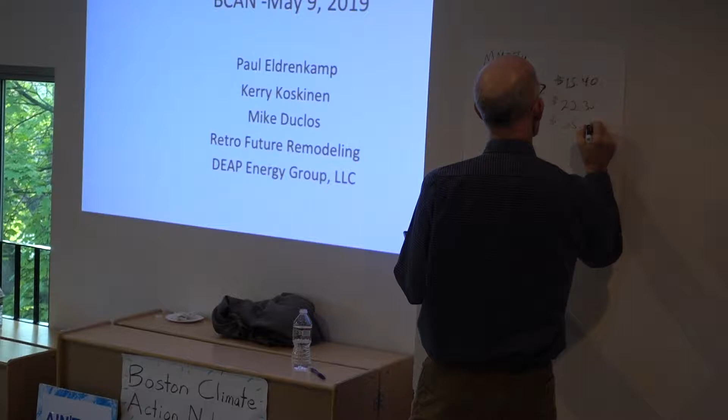It's a little more than $15. Oh, there it is, $15.40. I'm using average prices. A gallon of fuel oil costs $22.35, and a kilowatt hour of electricity costs $65.92. So that's a million BTUs, per million BTUs.

So we're asking people to electrify their homes. So how does that make sense if a million BTUs delivered by electricity costs 4 or 5 times as much as a million BTUs delivered by natural gas? This is something to be aware of. So the second thing you have to factor in is how efficiently can you use those units of that type of energy.

So how efficiently can you use natural gas typically? Does anybody know what an average efficiency for a boiler is? Maybe 90%, maybe. 90% for a good one that's humming along. A good oil boiler that's humming along is about... I'm going to compare 80% efficiency for gas and oil.

So I'm going to do another conversion. You'll have to take this on. You can come up to me afterwards and get the detailed math if you'd like. But I'm trying to make a broader point here, so I don't want to get too much into the math because I will lose the rest of the audience.

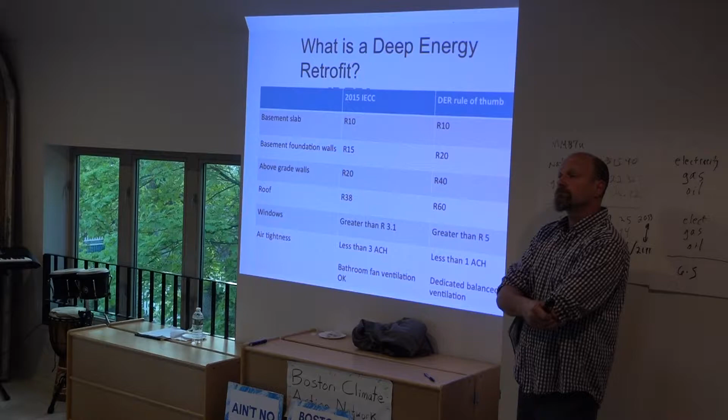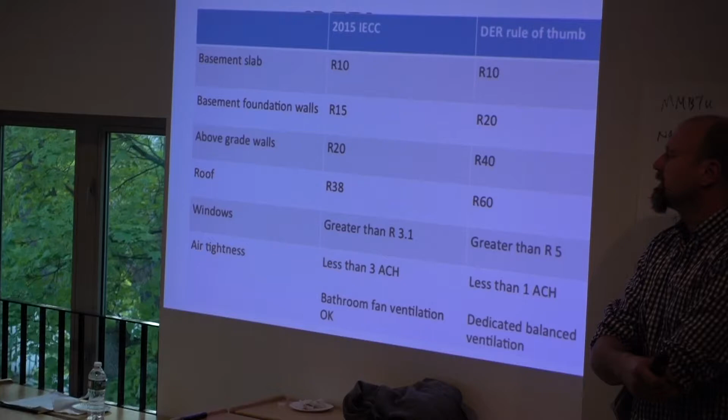So the question is, how do you define a deep energy retrofit? There certainly isn't a building code that says deep energy retrofit, but the main goal is that we want to do beyond what is called out in the building code, the energy code. And here's just a good example. The DER, Deep Energy Retrofit rule of thumb, originally came from the Building Science Corporation, I believe, which has been introducing these ideas and doing the research to vet out whether these things work and what's better and what's worse. But this is the general idea.

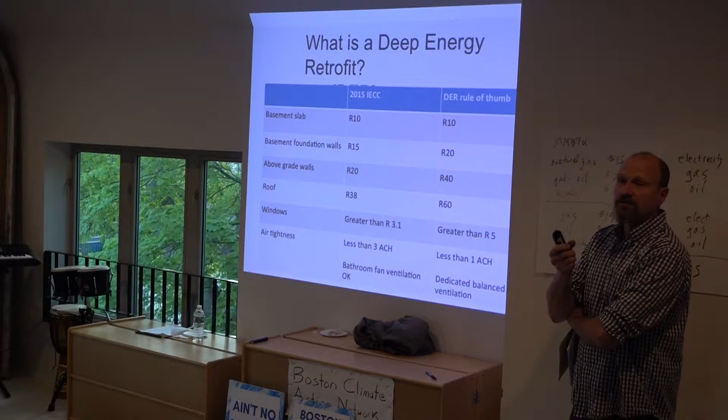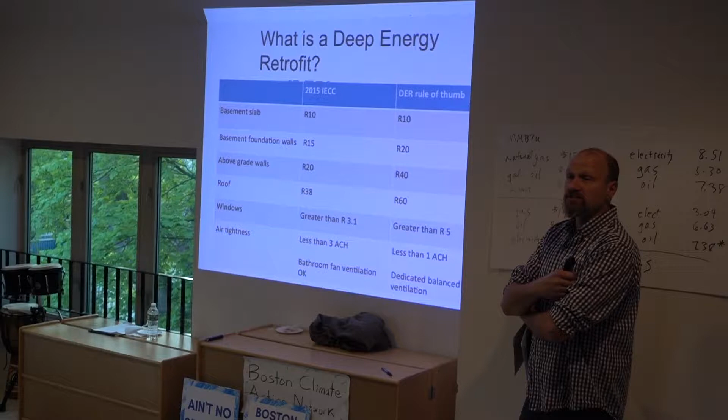And a lot of what a deep energy retrofit is, is increasing insulation levels by about double what our code is. We want to step up the efficiency of our windows. Generally that means going from double pane windows to triple pane windows. And airtightness is a big one. Airtightness is not very strict in the building code, and the tighter you get it, the less energy you waste through those holes and cracks. So in a deep energy retrofit, we aim to get it as tight as possible.

There is one caveat that I put down below: you can build a house to code and make it really airtight, and the building code allows us to use bathroom ventilating fans to ventilate the house, to get you fresh air to breathe. And as you can imagine, if you try to push air out and none comes in, you're not pushing air out. So ventilation, I have a suspicion that even airtightness still makes contractors crazy. They think all houses are going to rot.

Even in my recent construction supervisor's license class, the instructor would say, you know, here's what you have to do now for energy code. The jury's still out whether these buildings are going to rot or fall apart or whatever. And it's not true. This has been done for a long time. The science is actually fairly easy. It works. It's all for the best.

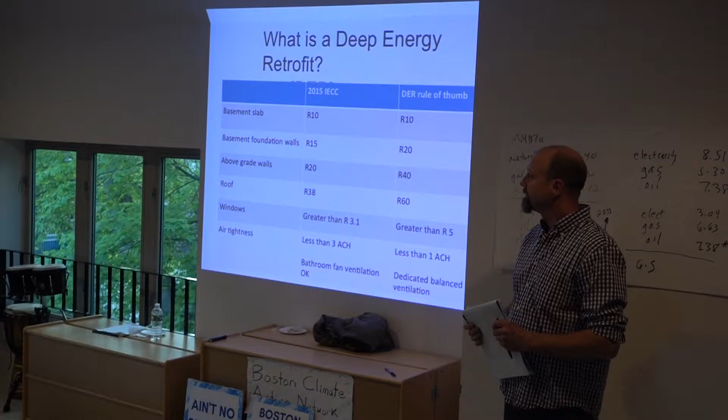So get as tight as you can, but we need balanced ventilation. If you're going to make a house airtight, great, make it absolutely airtight, but we do absolutely need full-on, dedicated, ducted ventilation systems. It's just something we don't address in general, and it's a cost.

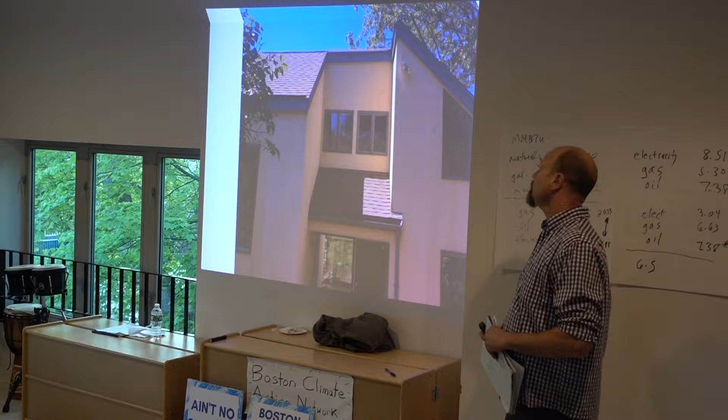So I'll get into some real nuts and bolts. This is a project I was part of. Actually, a Byggmeister project that I was hired to do the outside work on. So it's not quite a gut remodel, but it was pretty darn close. And it's a classic deep energy retrofit. So this is before.

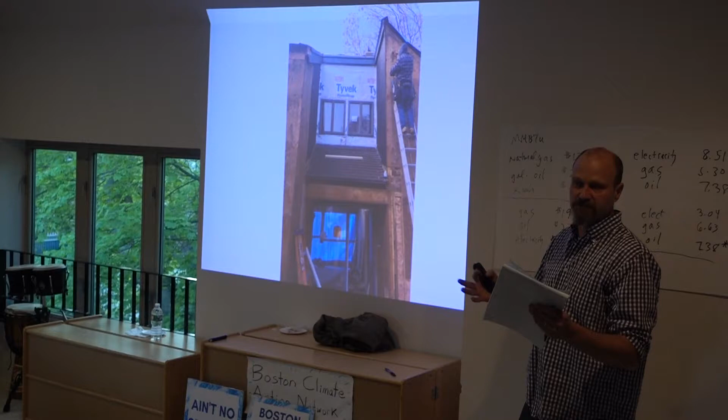You couldn't be more complicated in terms of angles and facades. So of course they all start out with strip it off, get down to the sheathing, and we didn't do it here, too technical, but this is generally the point where I put something on the building that makes it now airtight and testable with a blower door. And you can make repairs, do whatever you gotta do, to make sure you're as tight as possible before you start putting things on.

And here it is, underway. It's 2 layers of 2-inch polyisocyanurate foam board. It's foil faced. In this case, that foam board is actually the air barrier. So it's all taped, joints are all taped. The big gaps are spray foamed in and what have you. But this is, when you say R40 wall, that is 4 inches of foam, 2x4 wall with insulation in it. So that's what you get.

In this case, you will see, we actually stripped the roof and the walls at the same time and ran 4 inches of foam on the roof too. So it's one big igloo, like literally like a cooler.

Did I hear you say it's oil-based? Foil. Foil faced, I think I said. Oil-based. Foil. Thank you.

So we're worried about, in buildings, thermal efficiency. With thermal efficiency, we're worried about what I call thermal bridging. So materials that are conductive to heat, like the framing in your walls, are just like a radiator on your car. They're cooling fins in the winter. So you get a lot of advantage by having continuous insulation over your structure.

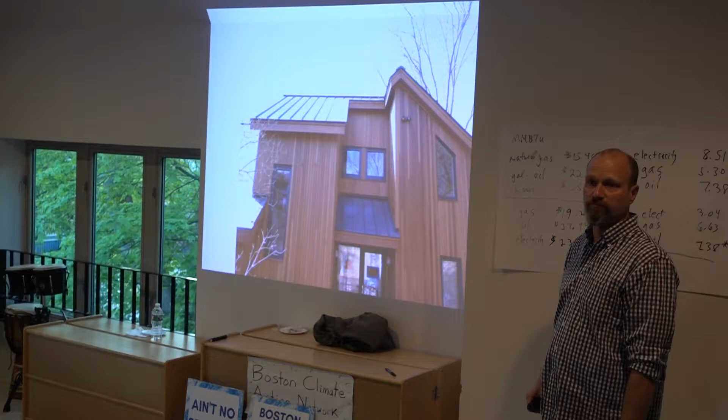And when all is said and done, you wrap all that ugly stuff, and it looks quite nice, and you wouldn't know it. It's actually hard to see here. Because it's a thick wall, when you put windows in, sometimes you'll notice that the wall is thicker either from the inside or the outside. And I will say that these are not only triple glazed windows, but they come from Europe, as all good windows do. And these are what we call an R value of like 7 compared to 2-ish of what would be code. So tilt-turn windows.

And of course, again, blower door. If you haven't seen it, blower door to address air tightness. On the side, I have a project. This is actually a 1780s cape with comfort issues. And so between moisture management and insulation and being able to maintain a 1780s house, it was an interesting project.

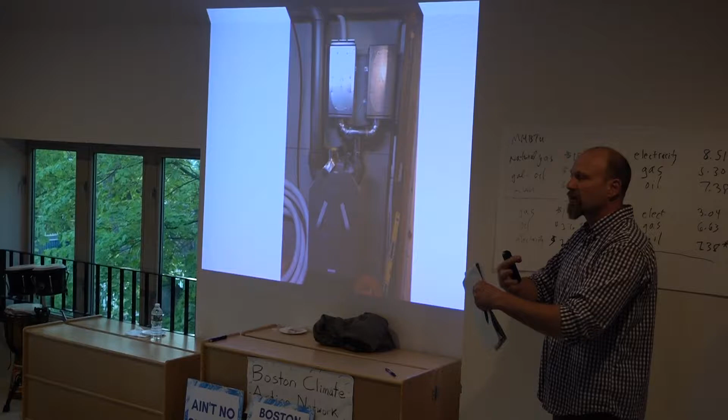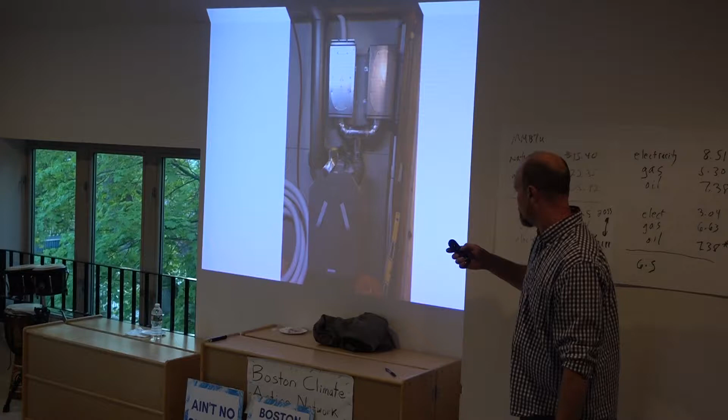And heat recovery ventilation. So all airtight houses need heat recovery ventilation. And this is a unit that takes air from outside and air from inside, and they cross streams. And energy-wise, fresh air comes in and is heated by the air that goes out. There are no ducts shown in this picture yet, but there'll be a pile of tubes coming out of here that go to every room. So that was an all-in-one house. Basement got insulated with spray foam, and everything else was really exterior.

And what did that run? Cost? I don't totally know, but I'll say the extra cost of adding insulation around the outside and holding that insulation in place to put new finishes on, 200,000 more maybe? Yeah, big house, but it is what it is. And does that include adding that new balanced ventilation? Probably not. And how much might that have been? 10 to 15,000.

I'm not sure if this is a relevant question, but in terms of that outdoor insulation, is there any bearing on indoor air pollution in relationship to that? To the product itself? Just even the process, what you're doing, because you're talking about completely airtight, right? I'm just aware that indoor air pollution is a big issue. So do you look at that relationship? Absolutely.

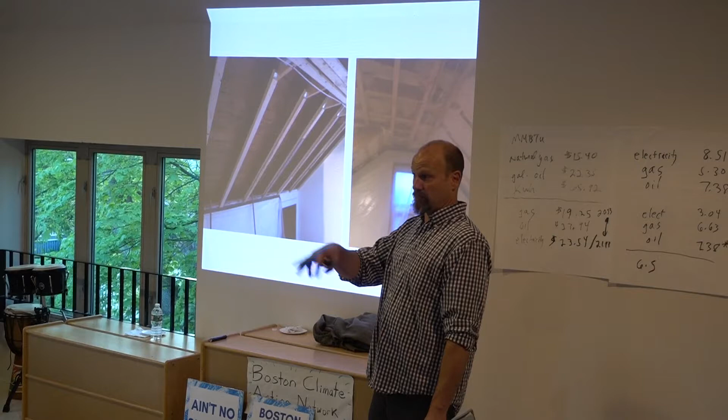Certainly Mike is more involved in actually monitoring how effective this is, but we are designing the ventilation system to accommodate exactly what you're saying. It's supposed to remove the pollutants. Now,

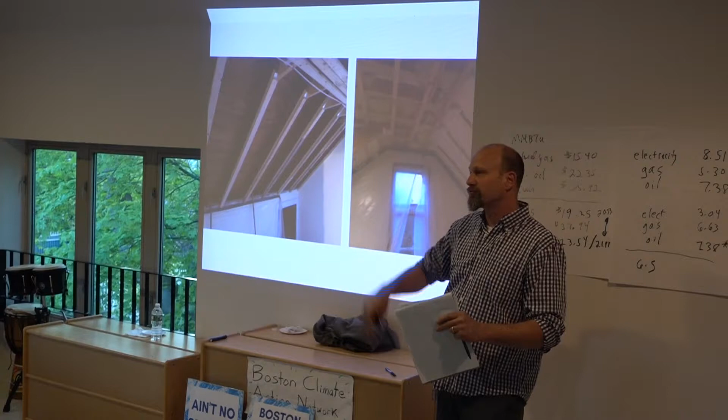you can argue that a not tight house, a very leaky house, could be far more polluted because air could be coming in through your basement and it's all moldy and whatever, and then exiting through your roof, or the opposite in the summer. I mean, when air is moving around throughout your odd spaces and walls and yucky stuff where mice live, it's not a good thing. So it's something to be concerned about.

Did that house get electrified? Totally, so there was no gas or oil being used in that house? I believe that's true. Maybe cooktop? Maybe? No, not even? Yeah, so nothing. And they have an adjacent garage with like a 10 kW array. The whole point was it's supposed to be net zero capable. And the math said it would be. I don't know if the jury's out, but it was not that long ago.

Is it correct to say that air tightening is a large category, and insulating is part of that, and then filling in tiny holes is the other part of that? In terms of order of most effectiveness for saving energy? Yeah, there you go. I think that's fair. Okay. I'd like to hear from these guys about that, but I think that's fair. And especially in light of what material are you using for insulation, what's the carbon footprint of that material, and I guess there's the order and my obnoxious truck that goes back and forth.

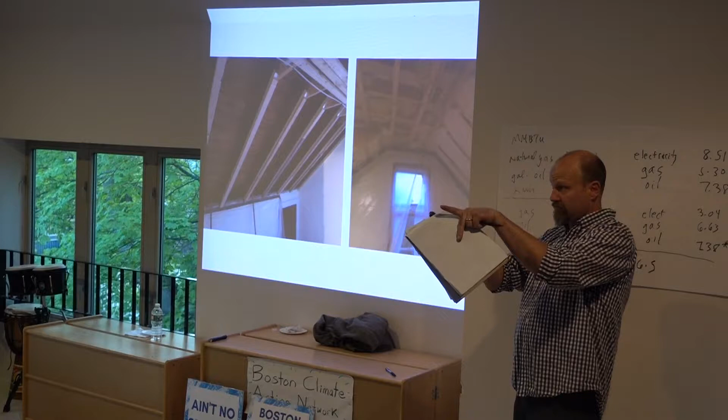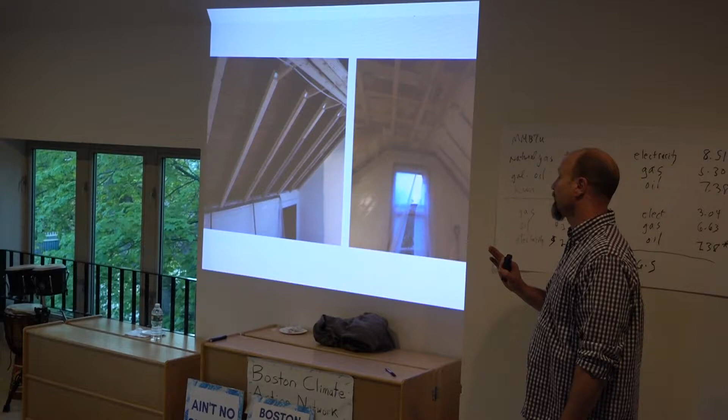So, very shallow old houses have 5-inch, 5.5-inch roof rafters. You only get this space, but you want this much insulation. So in this case, spray foam was the choice because of that. We're limited on space. It's the highest R value per inch. It was a low global warming potential spray foam. And I wasn't using it for a while until this product came out a few years ago. And now it's pretty much what people use. It's on par global warming potential with other insulations.

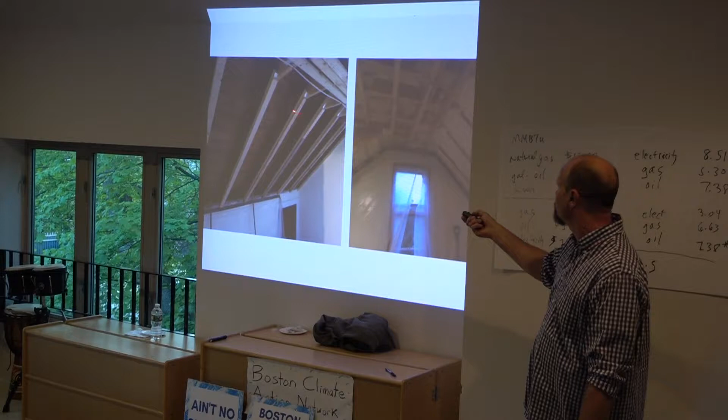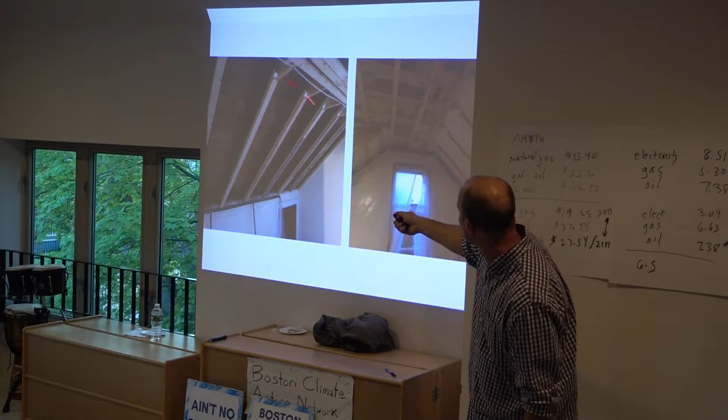So make the rafters a little thicker with some foam board separating the rafter from a new strapping surface for sheetrock. And actually it's too dark, but here's it before and here's it after. So we fill it right up, full. And this woman tracks her energy. She doesn't turn the heat on upstairs anymore. Totally comfortable. Doesn't regret a moment of it. Strip the ceiling, insulate it, put the ceiling with all the stuff back.

That project also is this one. There is a little area that was not accessible from the inside, so we spray foam it from the outside. Put it back in. Again, if I remember correctly, this is about $40,000, all said and done. And we didn't really change the living space in any way. We prevented ice damming, and we prevented her using excess heat. It's cheaper to get it right the first time. Yes. And there were structural repairs, all kinds of stuff.

So, do you have a sense of if she'll make that money back in terms of energy savings? My answer would, I think, always be never. There's no return on investment. No, you're doing it for a different reason, and often these reasons are durability, to be honest. Again, we're fixing. We've got a byproduct that the house is more comfortable and more energy efficient, but the ultimate beginning problem is that heat loss causes leaks with snow. Also secures a good price though, Tom.

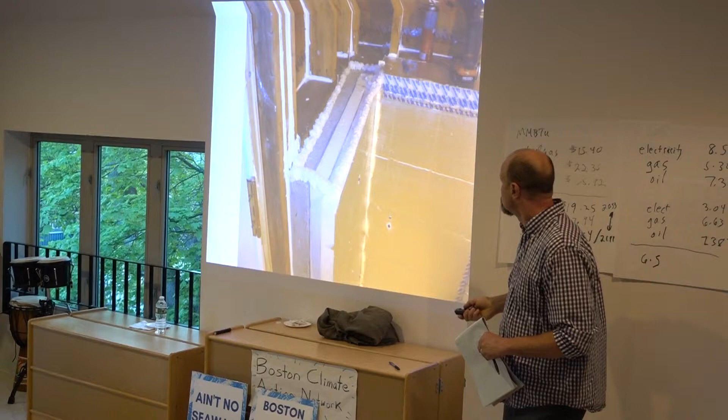You typically remove concrete basements and insulate underneath them, the floors? No. You just leave the floors alone? Stay tuned one moment, because right there. So, a few years ago, National Grid was sponsoring a Deep Energy Retrofit pilot program, and they were giving money out for Deep Energy Retrofits, if you've got a good project that needed siding, especially siding, windows, whatever.

I think my first one was a small ranch in Framingham. It still had its vintage 1945 look with aluminum windows that rattled and aluminum siding and all that sort of stuff. And a new homeowner bought the place and needed all this stuff. So he got $30,000 actually from NSTAR to implement the extra cost of triple pane windows and insulating the basement, insulating the attic, and doing all the walls. It cost more than that, but there was a program that was doing this.

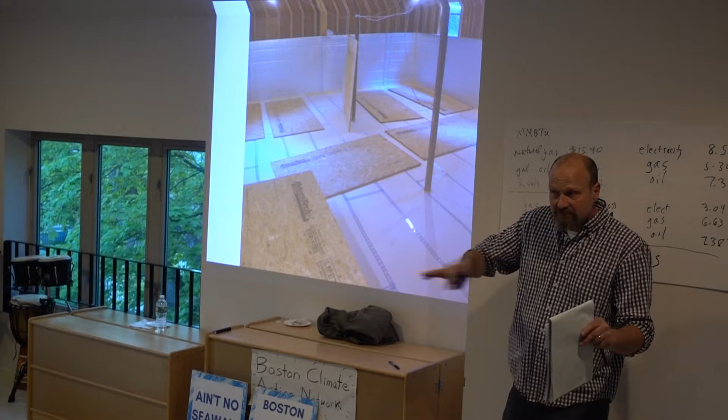In this case, this guy got funding towards doing a basement deep energy retrofit. As part of the program, you got money per square foot of what you addressed. So he got money incentives to insulate the floor. This is just a regular concrete slab. Put a dimple mat that has a little air space on top of the concrete. Then you put, in this case, EPS foam, the white stuff like styrofoam cups, a low global warming potential product that is very waterproof. And that's exactly what this stuff is on the floor. The 4x8 sheets are R10.

Would I do this without the incentives? Generally people aren't, because it's not saving energy so much as reducing the likelihood of condensation on your slab. It's a cold spot that's always 55 degrees if it's uninsulated. So the heat loss through it is not really that big. So you weigh the cost versus the benefit.

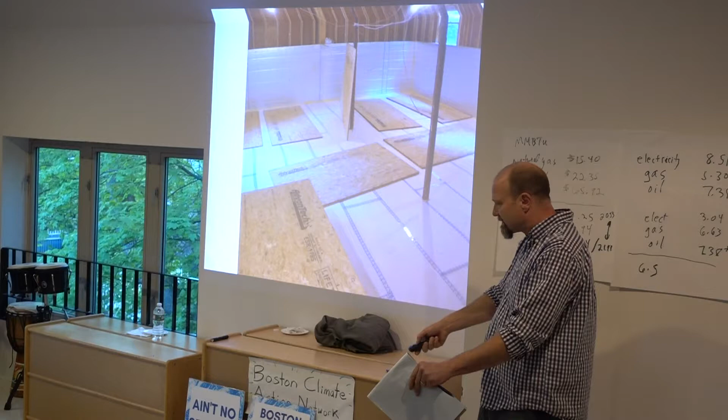Well, you said a minute ago that the level above was a lot warmer after you did this? Was it this particular procedure? It was not this particular one, but it's the same thing. This is a method not using spray foam to achieve the same result. Yeah. But there is an energy saving in that it's warmer somehow. Absolutely. Yeah, so I guess I misunderstood. Yes. Plus, I believe he used an electric heater once in a while. He had an office in the basement. He did his best, but had to use a little electric heater here and there.

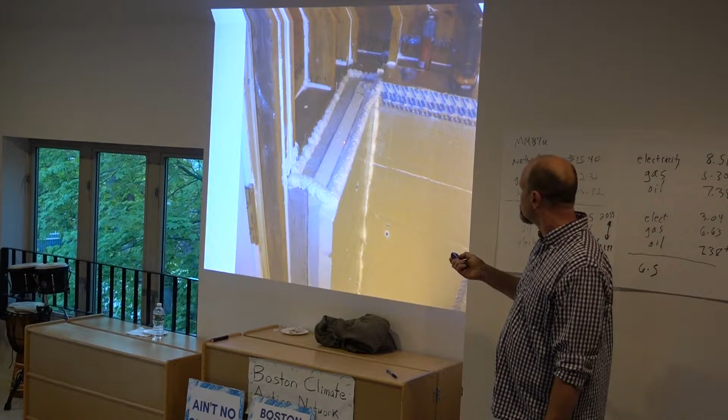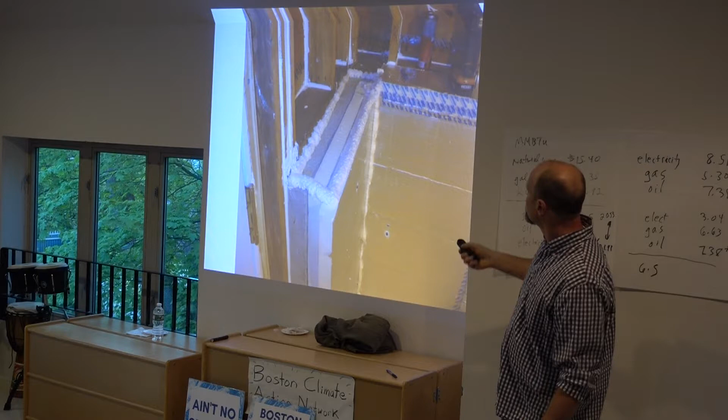So what I was saying is, yes, there is another way to do this without spray foam. This is sheet foam. Again, it's polyisocyanurate foil-faced foam, where you can tape the joints and make it airtight. We additionally make it airtight to the wood, and caulk all the seams and everything like this. So everything from the ceiling of your basement down is airtight all the way across.

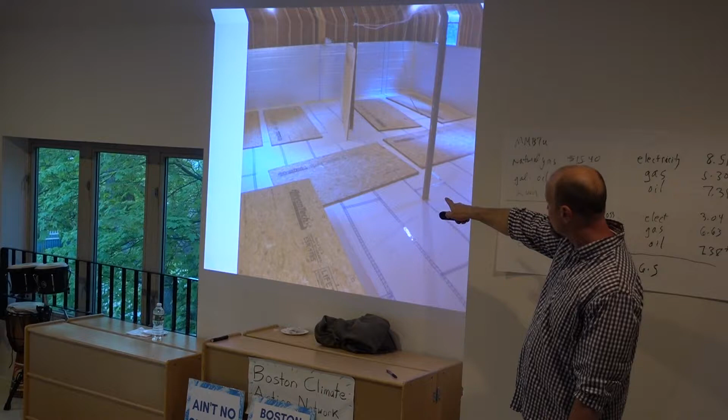And again, foam, plywood goes right onto the foam, screw it in with concrete screws, and you can put whatever finish you want on the floor. And in addition to the foam board we put in,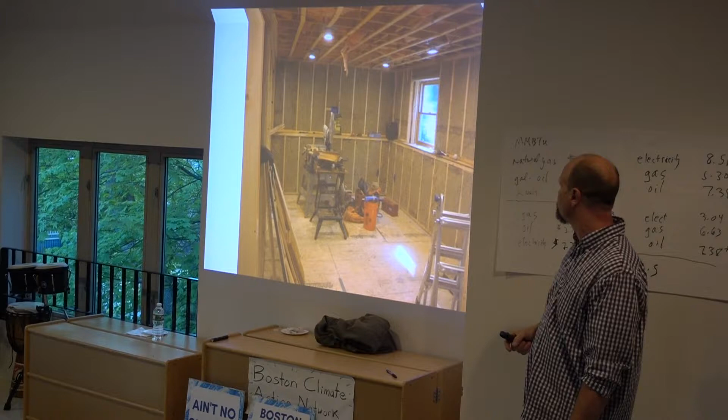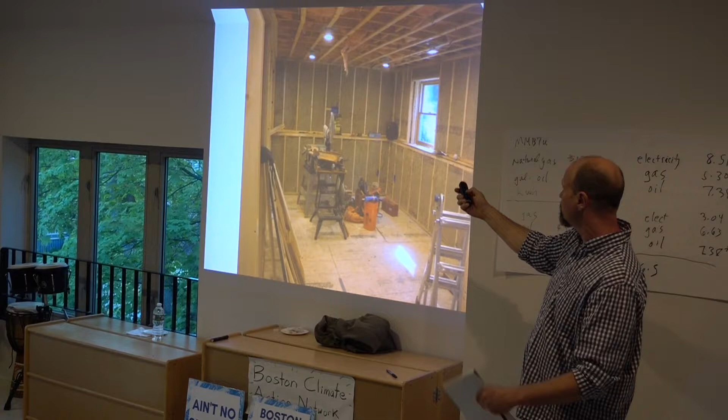we built another wall inboard to put sheetrock on, and filled that with another batt of rock wool, as well as filled the upper part with 2 layers of that. So that's actually R40 in just a fibrous product, and roughly that below too. That gets a vapor control layer on it that is not shown.

Yeah, I guess that's it.

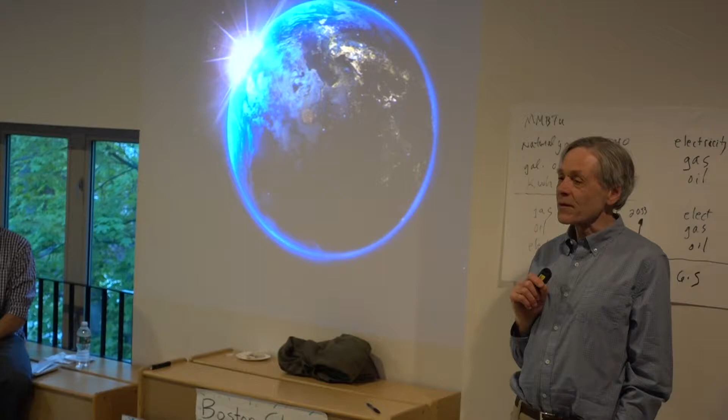This is where we live, and fun fact, let's say we took the world and shrunk it down to my size. It's 6 feet in diameter, all right? Let's say most of the atmosphere is below Mount Everest, 29,000 feet. Let's say we shrunk it down, so we have a 6-foot diameter sphere. How tall would Mount Everest be, below which most of the atmosphere is? Somebody guess. Millimeter. Small. Wow. About 51 thousandths of an inch.

Wow. So this layer that we depend on for life, and into which we're releasing a lot of CO2, is really, really thin. 1 gallon of gasoline, 6.3 pounds, releases 19 pounds of CO2. How is that possible, right? Because gasoline is a hydrocarbon. Hydrogen combines with oxygen and makes water. And carbon combines with oxygen and makes CO2. Fuel oil is worse. Gas, similarly.

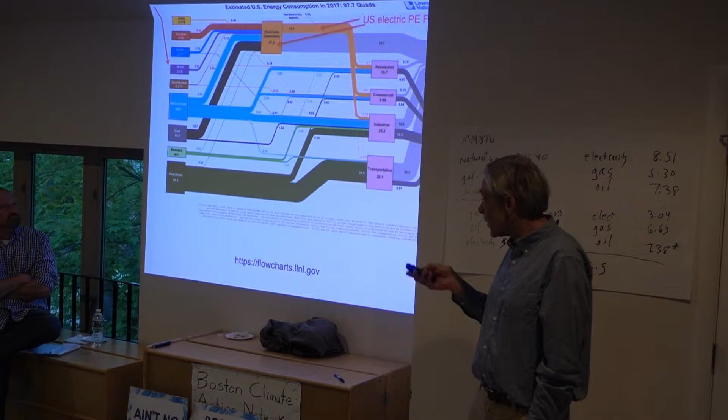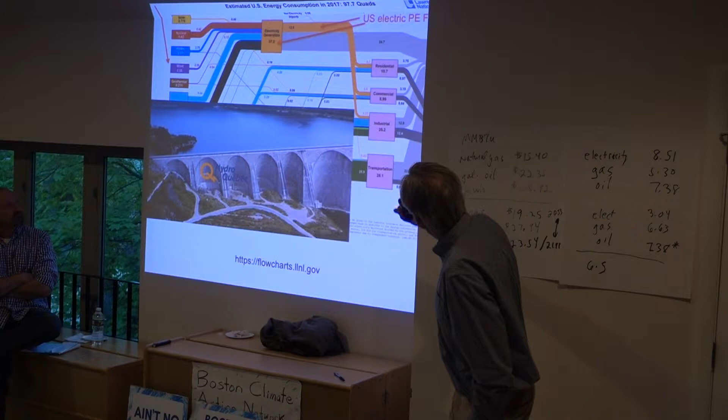And how we make electricity, we put in 37 quadrillion BTUs, it's a really big number of energy coming in, primary energy. And we have 12 or so quadrillion BTUs coming out as useful electricity, the rest is waste heat. So that's the big thing that Paul was talking about, generation. That's why electricity is so dirty, right? Because if we put in natural gas and coal, we only get out about a third. So the primary energy factor is about 3. It's about 3 to 1, just roughly.

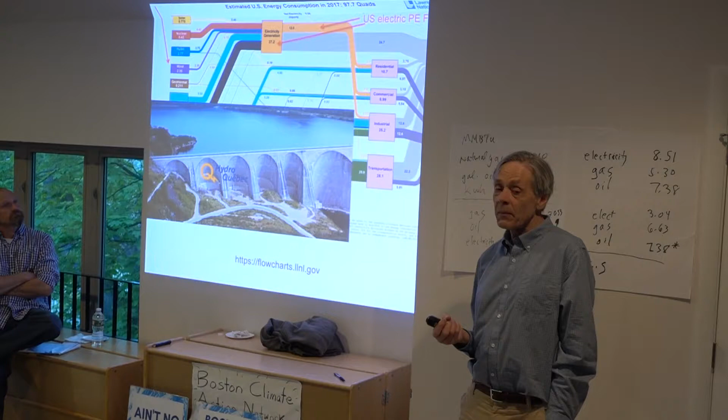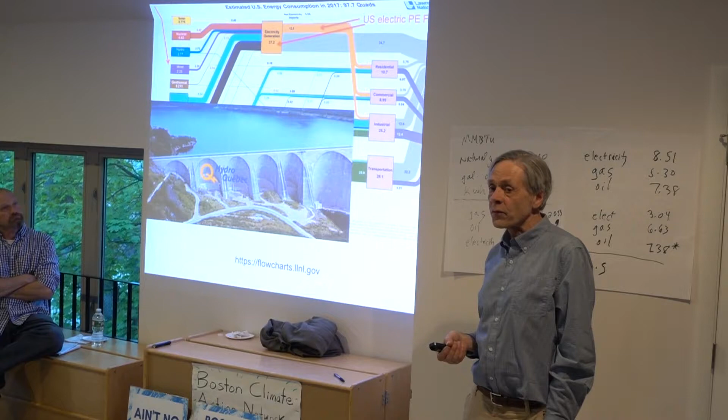So Massachusetts has this Global Warming Solutions Act, right? And they're moving to do a reduction of 80% of CO2 by 2050. The way they're going to do that is they're going to generate a lot of electricity renewably. And one method is they're going to get a transmission path through Maine and bring down Hydro-Quebec electricity, which is low CO2. And another thing they're going to do is put wind turbines out in the ocean, right? And so this process needs to get started and move along pretty quickly.

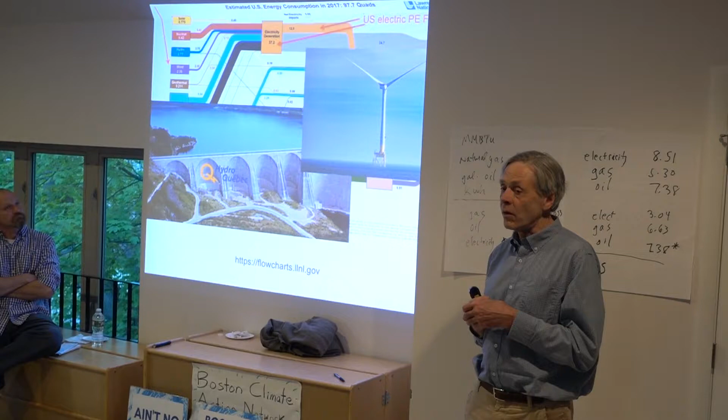And then finally, we're going to electrify all 3 million buildings in the state, except for the ones, as Terry pointed out, where it's going to be too hard to do. So 3 million buildings, we're going to do this in 30 years, it's 100,000 buildings a year. We're going to improve the energy efficiency of them somehow. We're going to electrify them so they don't use fossil fuels. That's the plan for the Global Warming Solutions Act Implementation Advisory Committee Building Subworking Group. If everybody wants to see that recommendation, I can show you.

So, the world's largest offshore wind farm is in the Irish Sea. It's an enormous facility, right? So they're doing things over there. This is five 6-megawatt wind turbines. This is off Block Island, okay, out in the ocean. That is the entire installed capacity of offshore wind in the United States today.

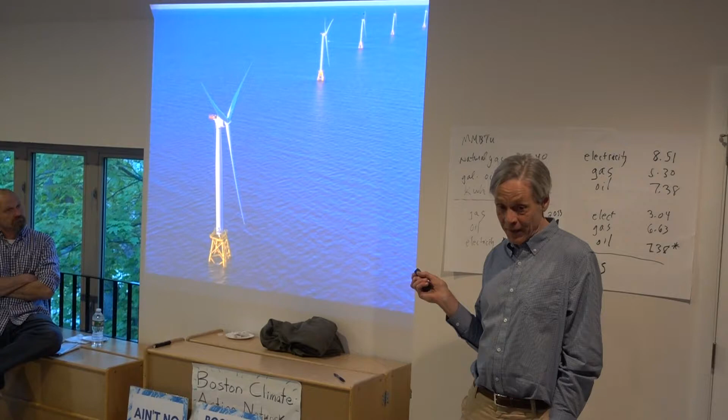We got some catching up to do. So you've heard about the procurements of offshore wind. You've heard about the leases. These are the leaseholds out in the ocean. Here's the little Block Island wind farm. So there are big plans out there, but they're not here today. This is going to take some time to build out and some expense and all that.

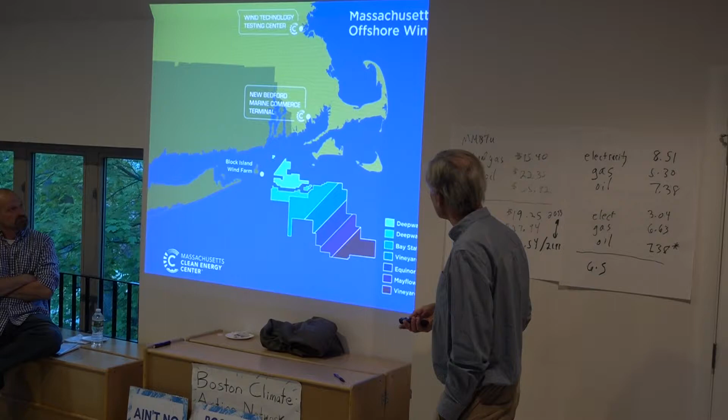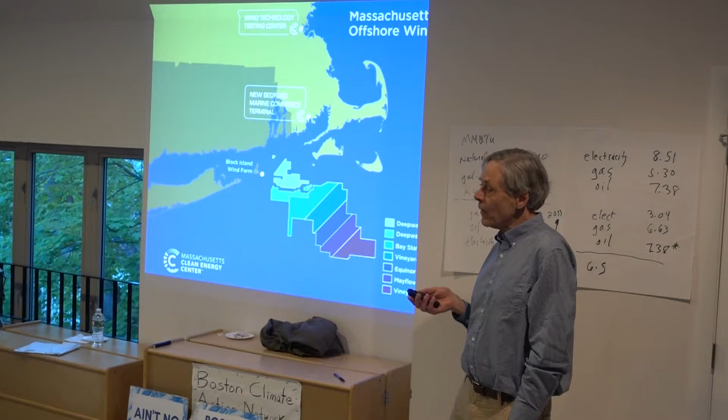But the first procurement of, I think, 800 megawatts came in at a surprisingly low price. People with DOER, our Department of Energy Resources, were shocked at how low of a price. So they're trying to get together with other states and aggregate this. So electrification and displacement of space heating is a big part of the plan that they have. Whether or not we'll be able to implement it remains to be seen.

So Paul was also talking about this idea of operational and embodied energy. Just to give you a little bit of a picture of this. So the embodied energy is in green, right? And the embodied energy, let's say this is a deep energy retrofit, or we're building a new house, your pick. You start out at the beginning and you do the work, right? So you add all this embodied energy with insulation and heat pumps and all these other things, and it's there, and it doesn't change. And then you have the operational energy, right?

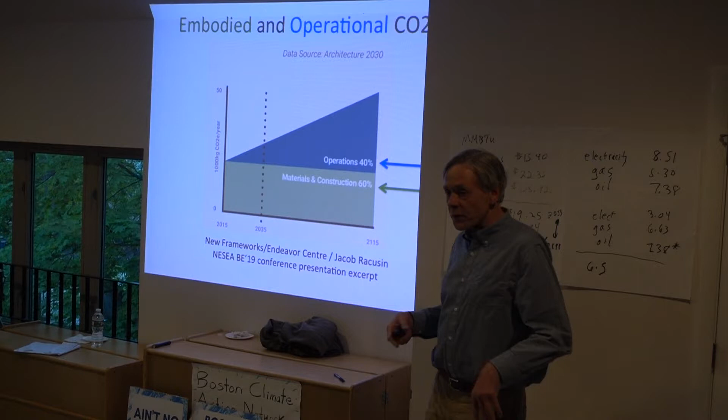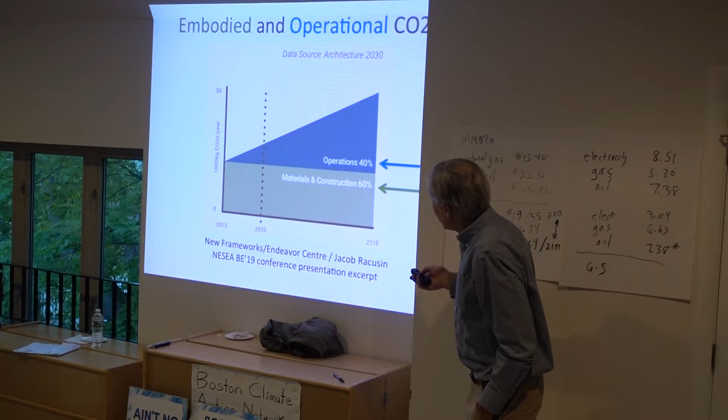So you start using electricity, natural gas, or whatever, hopefully all electricity, and year after year, your total operational energy, CO2, goes up. So this is good and bad. The good thing is the embodied energy doesn't go up. The bad thing is you spend it all now, right? It hits the atmosphere right away. So we need to be very careful with releasing large amounts of CO2 into the atmosphere by doing things that create a large amount of embodied energy. Paul talked about the ability to build houses and actually make them a carbon sink. Now do you see why that's important?

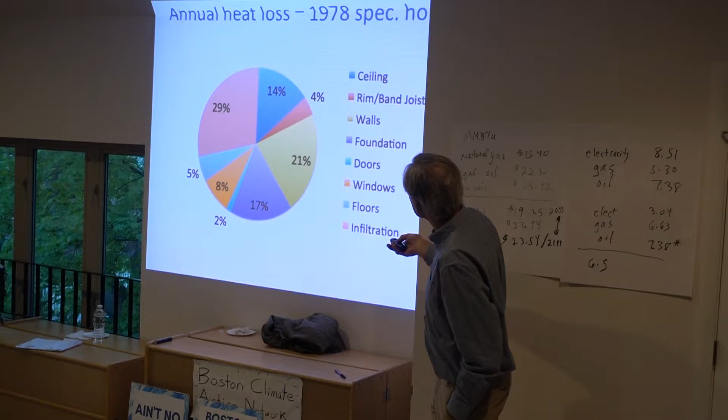So let's just focus in on that heat loss slice of the pie, okay? I've got a computer model now that shows where that heat is lost. So it gets lost in things like the ceiling, 14%, and the rim band joists, and the walls, and the foundation, and the doors, and the windows. Infiltration. Wow, look at all this. This is air coming in and out of the building, taking heat out.

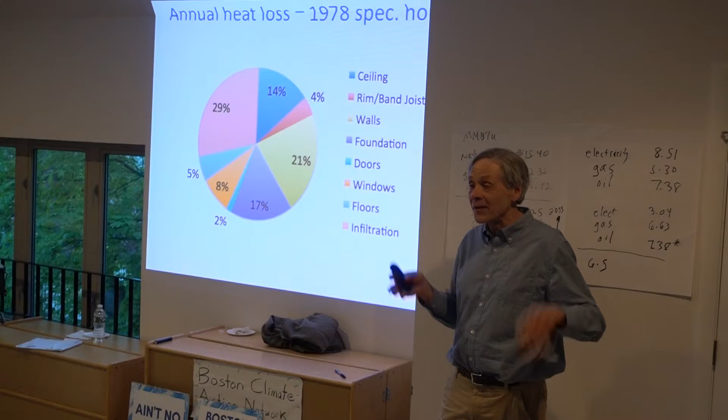And it takes so little material investment when you make a building new to do air sealing, right? You need a little bit of fabric or a little bit of tape. You don't need to use caulk if you plan a building out new. You can use tape, nice Euro tapes that are acrylics. So air infiltration is a huge lever, but the problem is when you have an already built house, it's underneath the siding, and you'd like to air seal it. That's another thing with deep energy retrofits: if you take the siding off, it's a big advantage. You can get that airtightness easily.

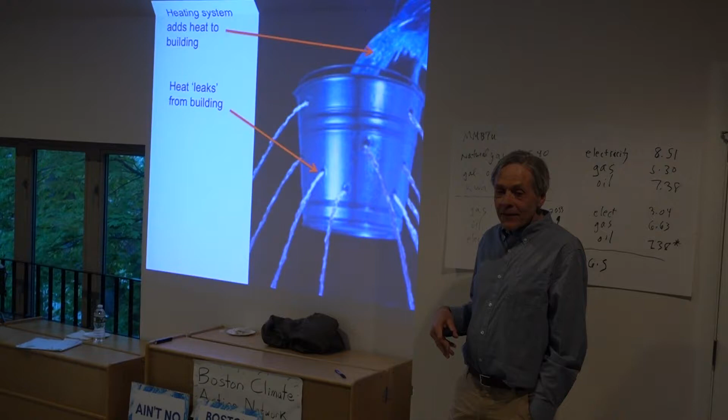So I look at a house from a space heating perspective like a leaky bucket. We've got a lot of leaky buckets around, and we're pouring in heat. So we have heat leaking out, and we have a heating system adding heat in. Now you start to think, gee, wouldn't it be a smart idea to plug these leaks? So wouldn't it be nice to do that? And this is the thing that passive house technology does, among a lot of things.

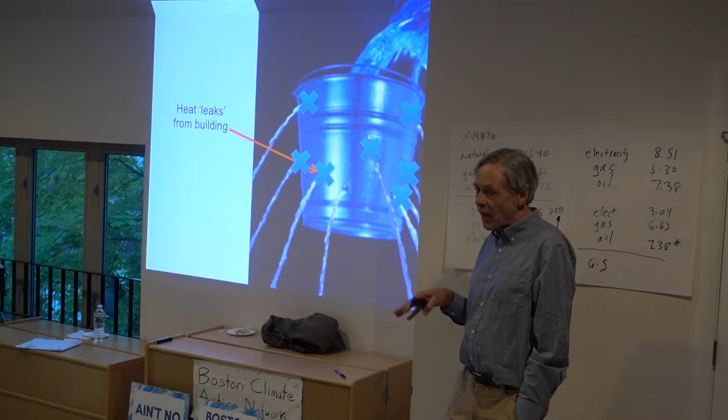But the big thing it does is it crushes space heat demand. It makes it minuscule. And then the heating system to add heat becomes very, very trivial. So there's a savings there. And if you do a deep energy retrofit, you have the same sort of thing going on, perhaps not to that extreme, but that's the concept anyway.

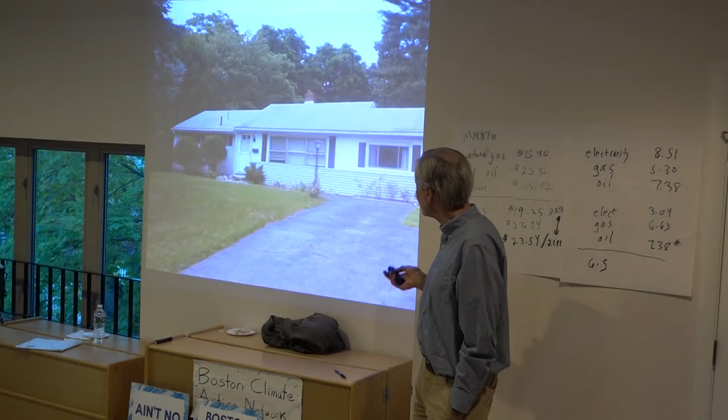Terry's wrapped this thing with 4 inches of foam and then air sealing, and there are a bunch of air source heat pumps heating it. And we've got a nice PV array, what, 10 kilowatts? Is that about right? So is this net zero, or it's probably pretty close? It should be. They don't live particularly frugally on energy. Yeah. So anyway, there's that.

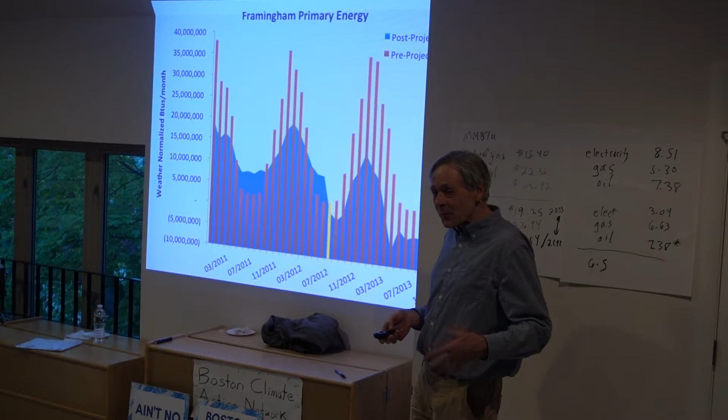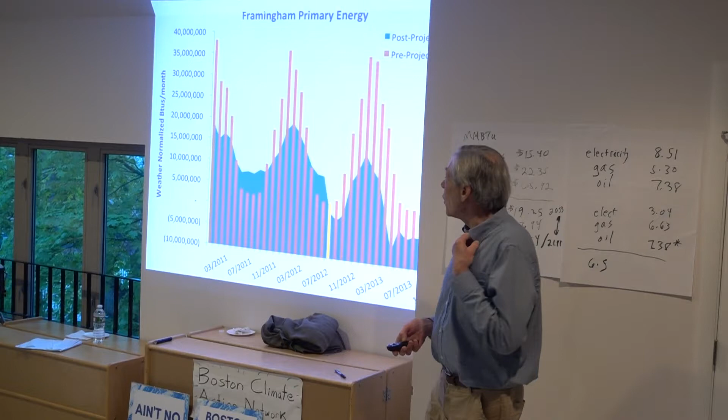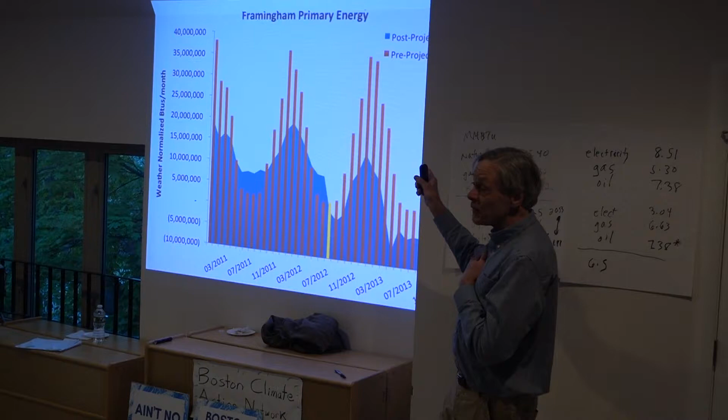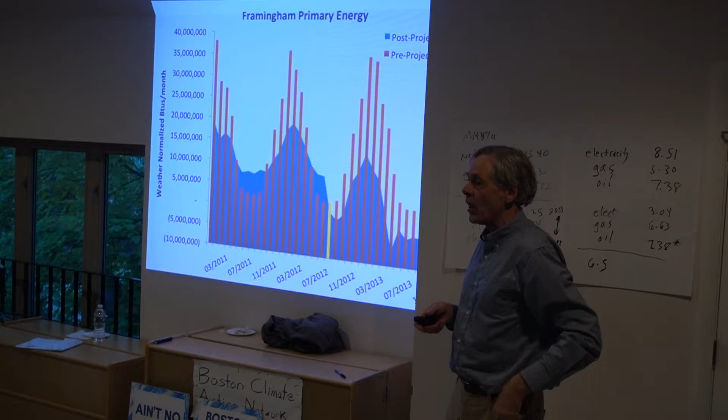So there's an impact there. And yes, we've made a big improvement, but the improvement isn't as big as you think unless you make low carbon electricity. The plans for Hydro-Quebec and the plans for the wind turbines out in the ocean. So things have to happen all together. All the pieces have to come together for this plan to work. And there are a lot of moving parts.

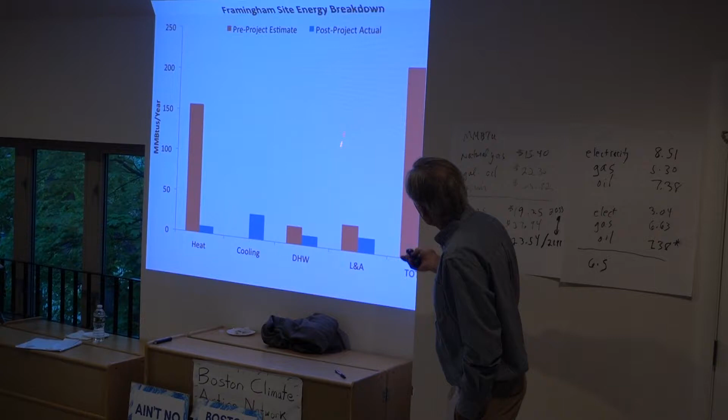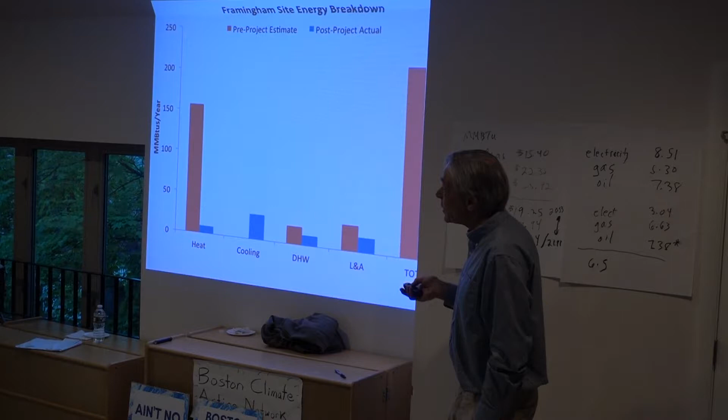So again in red, pre-project estimate for heating, and blue is the actual data we've taken, so we've crushed space heat demand, right? That's one thing deep energy retrofits do well. They didn't have air conditioning before, but air source heat pumps do that, so they do now. Domestic hot water, a more efficient electric system, and lights and appliances. So the total is a great decrease again in site energy. And in primary energy, not so much, again, because we're counting all the fossil fuels generated to make our current electricity grid work.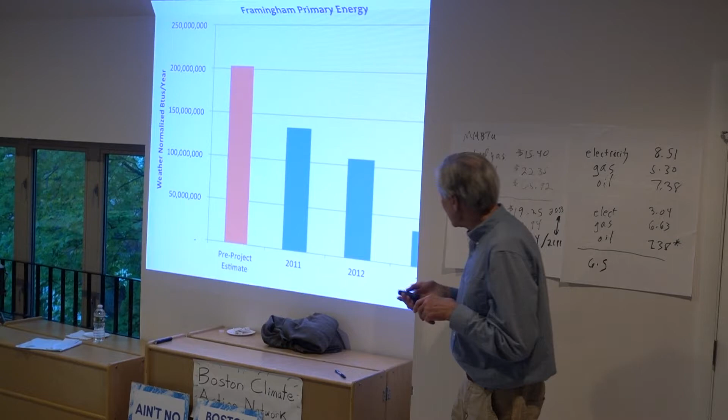Pre-project estimate. And notice that it goes down after a couple of years. This was learning, right? This is one of the first projects we did with air source heat pumps, and we were learning. A really good system was actually installed, but they were trying to use it like a fossil fuel-based system and setting it back at night, lowering the temperature, and air source heat pumps don't like that. When you have air source heat pumps, you set them up, you run at one comfortable temperature all the time, you leave them alone. So they learned that, and that's the energy reduction. Not only did they use less energy, they were more comfortable. So new technologies, new things to learn, and in this case, it makes you more comfortable also. A win-win-win.

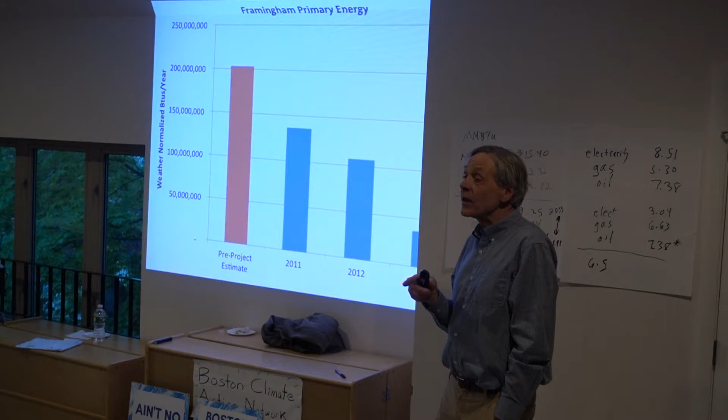Mike, yes. Just one furthermore, turning the breakers off. That's another thing. We've learned things by detailed energy monitoring. When you don't need these things, if you turn them off, they use less energy, because they use a little bit of energy, but they're not doing anything for you in the way of heating and cooling. Yeah. But there's a way around that with the thermostat, but there are lots of details.

Okay, so here's another project. This is another big Meister project. And this is in Belmont. Here's the before picture. There were two families that had homes that were not very good, and they bought this home, which really needed help. It needed new siding, it needed new windows, it needed new everything. So all that stuff was coming off.

It was a great opportunity to get at it underneath, make a good air barrier, add the foam, and then put the siding on. So a great candidate for a deep energy retrofit. Very simple shape, right? Nothing crazy like that first house with all the ins and outs. Just a very simple box type thing. And so that one worked very well.

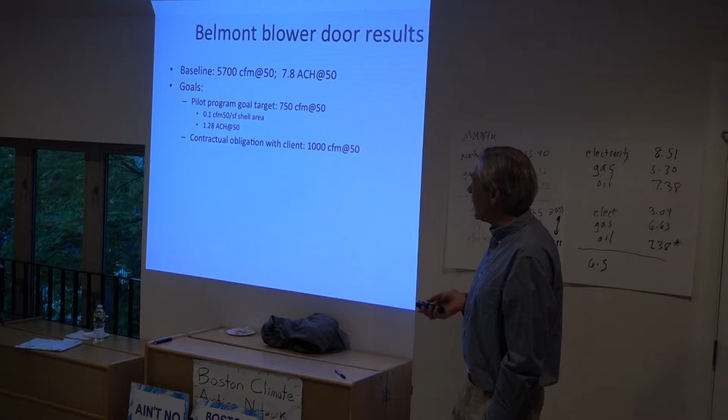The blower door was a very big thing for us. We didn't have much experience tightening houses to a very, very airtight level. So before it was 5,700 cubic feet per minute at 50 pascals of test pressure. And the pilot program goal was 750. And Paul negotiated with the client for a pretty low number. And his crew beat it.

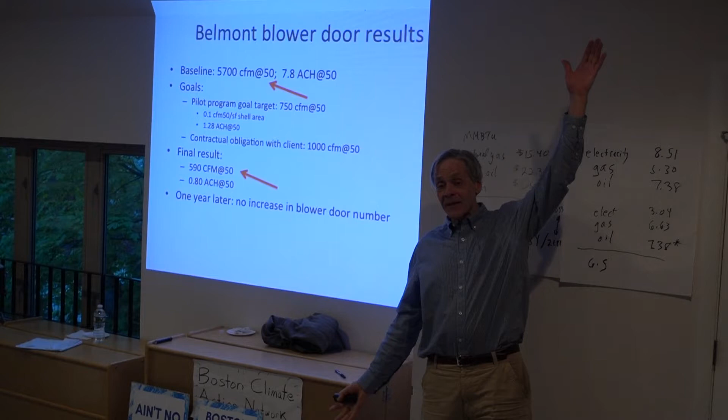So this is, right, a factor of almost 10 reduction in air infiltration. Remember that big slice of the pie, the air infiltration part? Yeah. So that was a very important part of reducing space heating energy demand in this house.

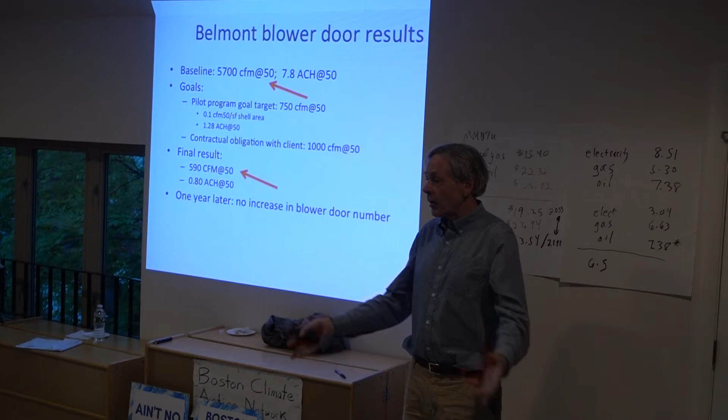Can you describe exactly how that blower door functions? So you open a door to outside, you put the blower door in, and it blows air out of the house. Blows it out, and you adjust it so the pressure across inside to outside is 50 pascals. A tiny amount of pressure, like a 20 or 30 mile an hour wind blowing on the side of the house.

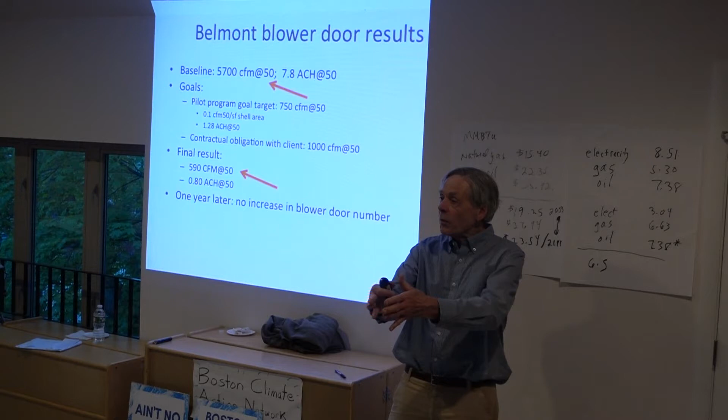So then air is leaking in, and all the air that leaks in goes through the blower door fan. And the blower door fan has a measurement device. It measures how many cubic feet per minute of air is going through it. So the test pressure is like the force that you're exerting, and the blower door fan measures the volume of air. Does that make sense? Yeah, but so the actual function is to keep exterior air from blowing in? So the actual function is simply to test the leakiness of the building.

Oh. And the reason is this. Well, no, it's a good question. So the reason is this, right? There's no blower door fan in there normally, right? No. So it's to measure the leakiness of the building, because when the fan is gone, what happens is stack effect. It's colder outside than it is inside. Air leaks into the basement, warms up, and then it comes into the house and absorbs some more heat, and it leaks out the ceiling.

And so air washes through the building, comes in and goes out, and that cycle is called convection. And that is 25-30% of your heating bill. And it takes all the moisture out of your house and makes it very dry in the winter. So you take that blower door out after you've done your assessment. That's all done. And what it's done is it's measured how leaky your house is. So no, it's a really good question. You have to make that connection. It tells you where the leaks are too. Right. It tells you where the leaks are. Yeah, so there's even more.

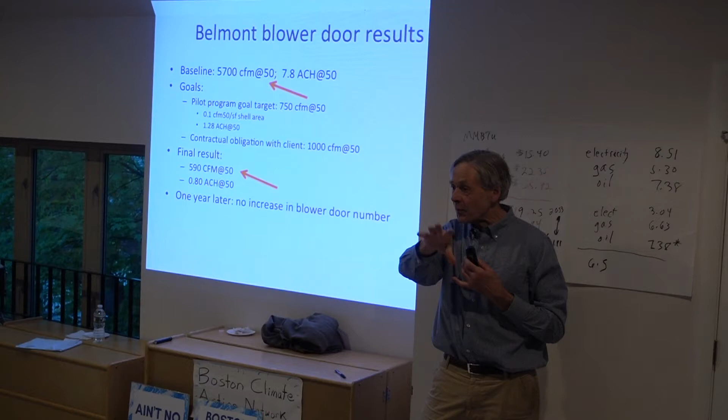And we use this method to drive down air infiltration. Because as you find leaks, you fix them, you watch the blower door number go down, and then when you can't find any more, you say, well, that's good enough. So we can do extremely airtight buildings. And by the way, this improves indoor air quality, because it means you don't have air going into your building, picking up mold spores, chemicals and all that, and bringing them to you.

Airtight buildings have higher indoor air quality if they have a properly designed and implemented balanced ventilation system. Including if you're susceptible to allergies and things like that. If your building is airtight, you have one place you're bringing air into your heat recovery ventilation system, and your filter is there. Pollen stops coming in. And if you're concerned about particulate matter, PM 2.5 from diesel trucks and things like that, you put a better filter in there. And your air is much cleaner than outside. Airtight building, yes.

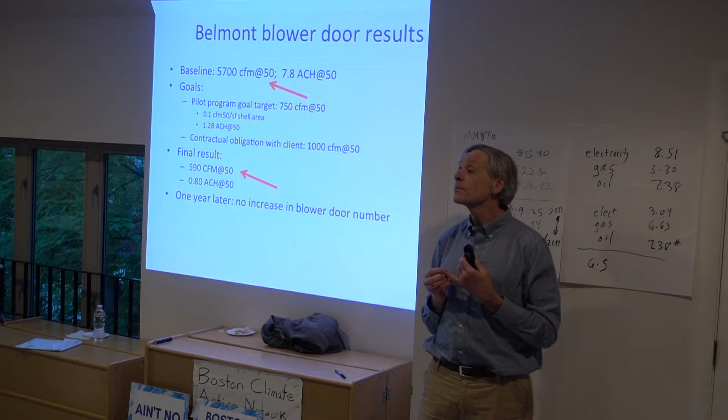When you're assessing higher density buildings with multiple units, can you use the same technology, or do you have to take it unit by unit? Absolutely, in fact, it's easier with big buildings. Yeah. Because you can take a more organized approach, right? The bigger building has more units to treat, so there's a bigger budget for engineering, for design.

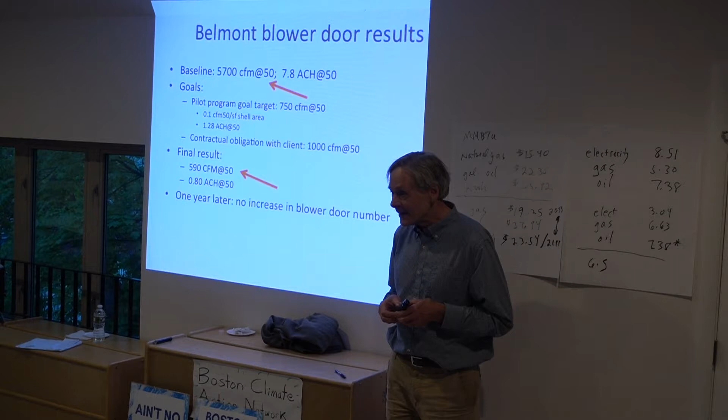We just completed the first multifamily passive house certified in New Hampshire. It's low-income housing. Didn't spend a lot of money. In fact, they got a very small amount of money because it was passive house certified. But now each unit has ventilation, specifically balanced ventilation. It has nice thick wall systems. It has really high performance windows like Terry was talking about.

Low income housing. This is all over Europe. This is what they call social housing. That can co-produce reductions in asthma and other things. Correct, exactly. In Europe, they've got this down. It's social housing, they own it. They know the operating costs, they want people to be happy. I've gone into a basement and seen 15 or 16 heat recovery ventilators. Each unit has their own. Wow.

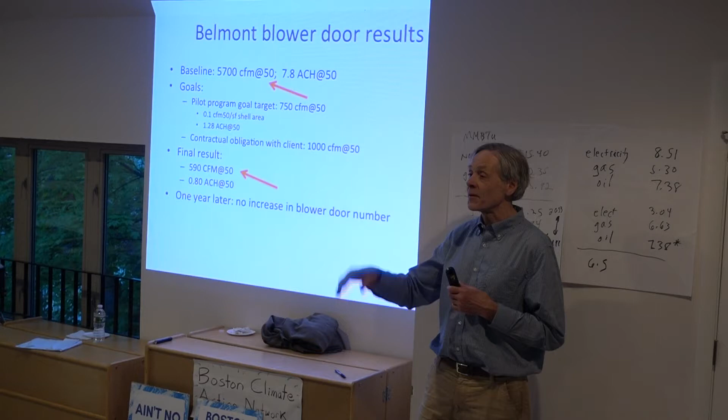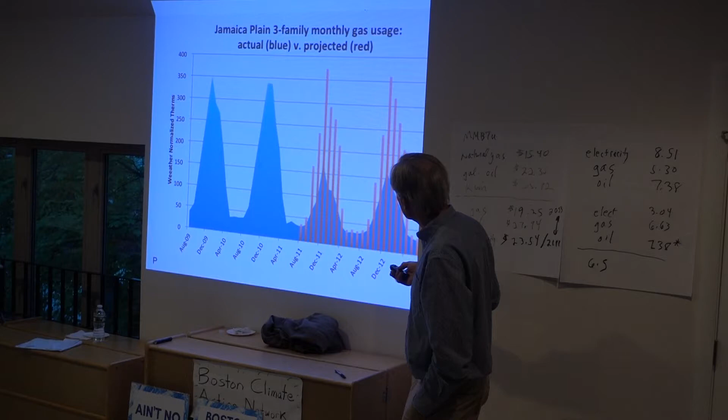But if the grid isn't green, how can they not? It's got to get there. No, I know, but right now they're making electricity with their solar PV array. Yeah. So net metering works like this. Let's say it's daytime. Let's say sun is shining on this array. It's making more electricity than you need. It runs the electric meter backwards. You build up credits. Sun goes down, right? Now you pull credits back.

In the summertime, you produce more than you consume because you're not heating. In the wintertime, you need more than you produce. But if you have net metering over a 12-month period, it's like a lossless balance. It's like a credit account for your electric. We have solar panels. Yeah. So that's how net zero is made much more practical. So that really is it.

Why and how did Europe get ahead? Why are they ahead? They've been doing this for... Why? Political will. Humboldt was a German scientist. He first heard about climate change in the year 1800. The Germans have been on this for a long time. Dr. Feist created the Passive House standard specifically to address climate change 30 years ago. This has been well known. They get it. Well, how can we transpose that will? That's a good question. I don't have the answer to that. That's the ordinance. That's what we're here for.

Our new campaign is focused around the largest buildings here, the worst offenders, and I watched that video that you recommended and you had some of the slides from there. There are some magic materials to have carbon sinks in new buildings like this hempcrete. Right. Do you have a magic bullet for insulation instead of using foam? Use something that absorbs carbon for old buildings, for retrofits. Blown in cellulose? Yeah. Because I think that's kind of the direction that we would have to go and push.

So Northeast Sustainable Energy Association, Building Energy 19 conference happened in March, and there was a video about this. Is that the video you saw? Yeah, exactly. Send it around. We should watch it before the presentation. That's a great one to watch about this concept. And so you use materials that actually bind carbon rather than using the blown foam, as you showed in your diagram. If you insulate the house, first you increase the carbon footprint and then you decrease it.

And so I think we can't afford this anymore, basically. So we have to look at materials and propose that the city puts regulations in place to use such materials. I guess that's probably our angle. We need you for that.

Asking that, yeah. While a building is going through a deep energy retrofit, can people live there? Can it be used, functioning, whatever it is the building is? Mostly housing units. Karen, why don't you take that?

It's hard. I did a study tour with NESEA, Northeast Sustainable Energy Association. A small group of us did a couple study tours, and we visited a major apartment retrofit near Stockholm, where it was more cost effective for them to give all the occupants a 5-week vacation to Turkey to get them out of the building, so that they could retrofit while they were all gone. It's hard.